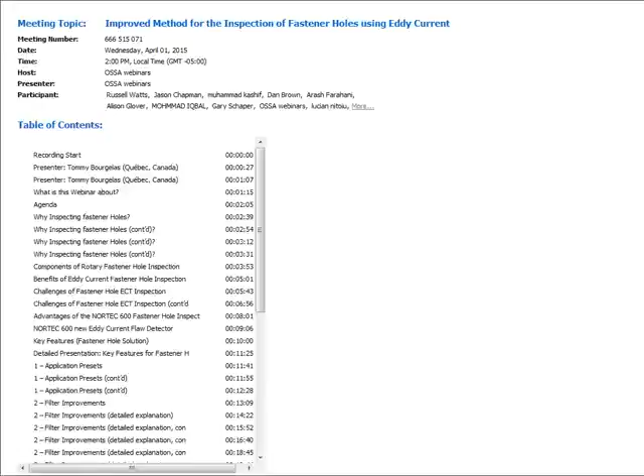I'd like to welcome you all today to this webinar titled Improved Method for the Inspection of Fastener Holes Using the NORTEC 600. This Olympus webinar is an introduction and overview to the fastener hole inspection solution in aerospace applications using the NORTEC 600 eddy current flaw detector.

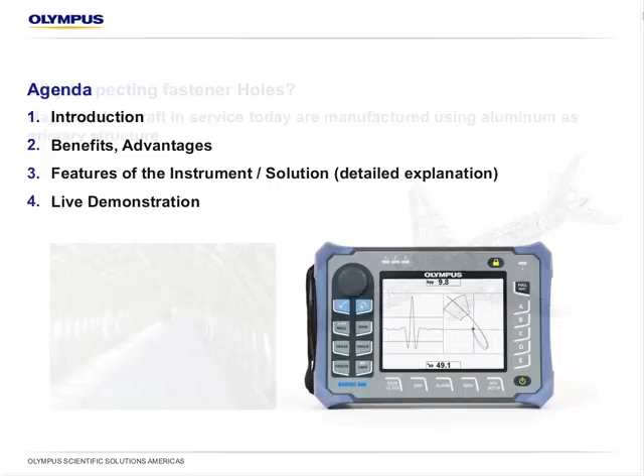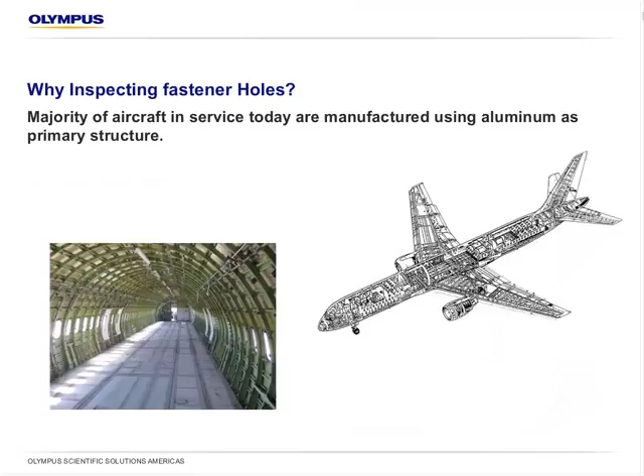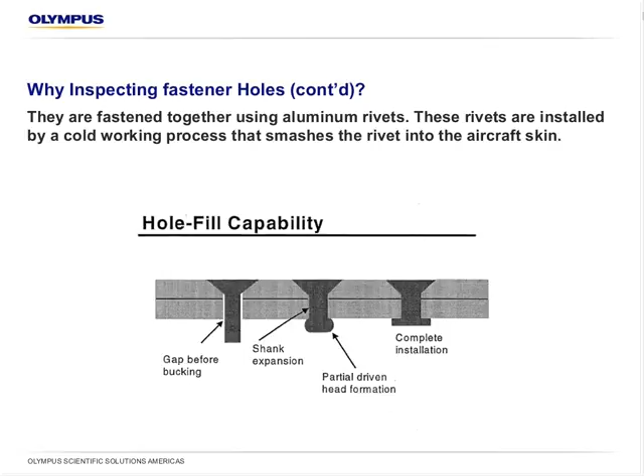So, why inspect fastener holes? Well, I don't think that's new to anybody listening, but the majority of aircraft in service today are manufactured using aluminum as primary structure. All those skins are fastened together using aluminum rivets, not only the skins, but the structures and the units, a lot of things. Rivets are installed by cold working processes, smashing the rivets or bolting parts together, eventually to the aircraft skin.

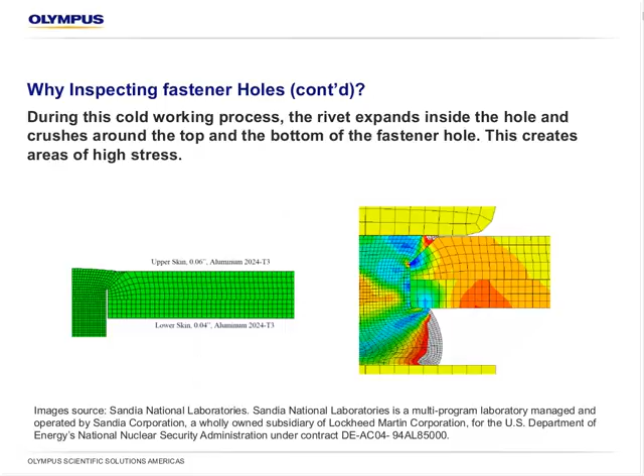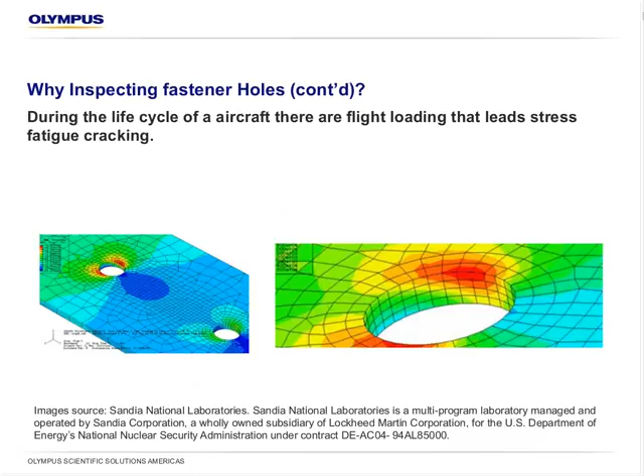So, obviously, the insertion of rivets in particular does stress the rivets themselves and the skin around them, creating areas of high stress, which can be seen in red on those simulated pictures. It's the same during the flight cycles. After a number of cycles with repeated load on specific areas around fasteners, those skins will eventually develop cracks, which can be detected by this eddy current method.

So, the eddy current test, we call that the rotary fastener hole inspection. Often you'll hear me say bolt hole inspection. During everyday work we refer to it as bolt hole, but it does not only inspect bolt holes, but rivet holes and all kinds of holes. So the first component is the probe itself. I hope you can see my laser pointer here, but that probe rotates inside the hole to be inspected. And this is powered by a rotary scanner.

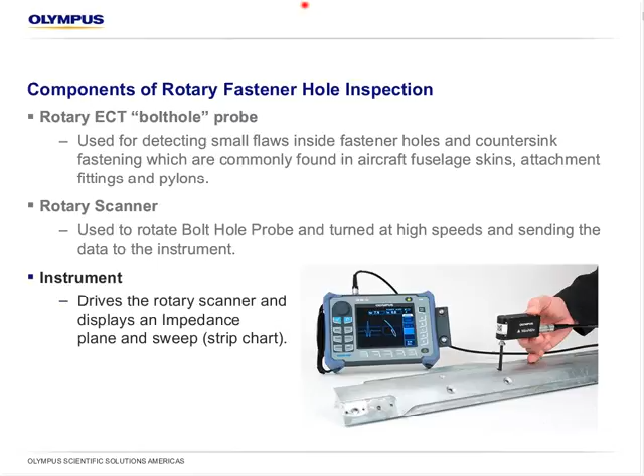Here's the example with the mini scanner. It's used to rotate the probe and also sends the data to the instrument. The instrument drives that rotary scanner, which is basically just an electrical motor and a couple of electronic components. And inside the instrument, we can see an impedance plane and often a strip chart display.

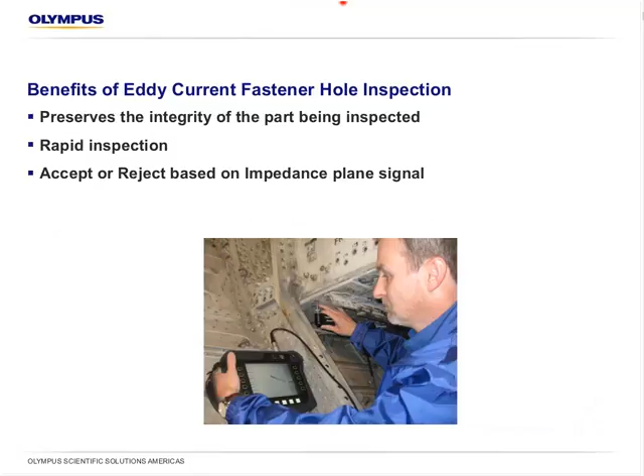So, benefits of eddy current fastener hole inspection. Eddy current allows you to preserve the integrity of the part being inspected for the simple reason that there are no chemicals involved; nothing can alter the chemical composition, has to dry, or will cause corrosion. No paint has to be removed. A lot of reasons make eddy current ideal to preserve the integrity of the part. It's also a very rapid inspection and can be configured as a go-no-go, a fairly simple accept or reject based on the impedance plane signal. However, there are challenges in doing that inspection. I'm going to more or less read the text here.

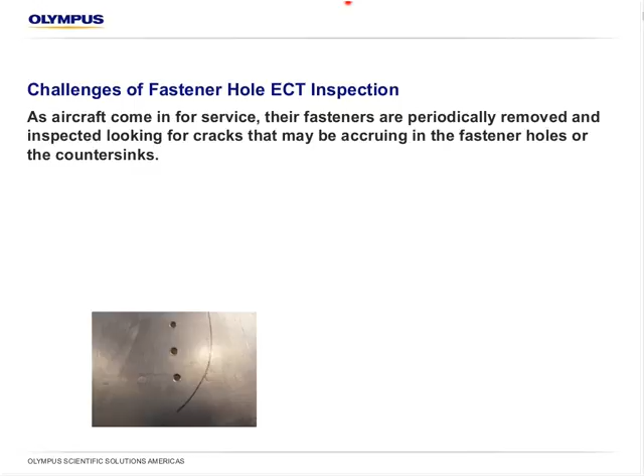Basically, as the aircraft come for service, their fasteners are removed and inspected, looking for cracks that might be occurring from the fastener holes or in the countersinks. So during the removal of those fasteners, there's a lot of various damages that can occur into the hole itself. While that damage might not be detrimental to the life of the aircraft, it can certainly generate quite a bit of noise or unwanted signal on the eddy current.

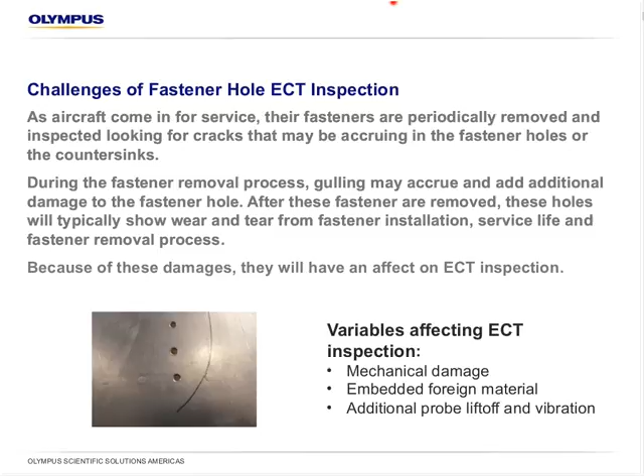So we call them variables affecting eddy current inspection. Well, mechanical damage, let's say some threading, some scratches being done as the fasteners are getting removed. Embedded foreign material, whether it's from the installation or occurs during the removal of the fasteners, and additional probe liftoff, which is caused by vibration, can also be observed. So the mechanical damage and all the embedded foreign material, additional liftoff, will have an effect on the impedance plane. However, they can be interpreted from the impedance plane of the instrument.

The filters, typically there's a high-pass and low-pass filter on the instrument. They are key to facilitate the signal interpretation. And generally speaking, those filters are not that well understood, and also different operators or operators using different equipment can have different results on the same part or on the same calibration specimen. So tuning the filters is always a bit tricky. Moreover, when changing the rotation speed of the scanner, one would need to readjust the filters to make sure that the band of frequencies allowed remains acceptable or allows the test to be made.

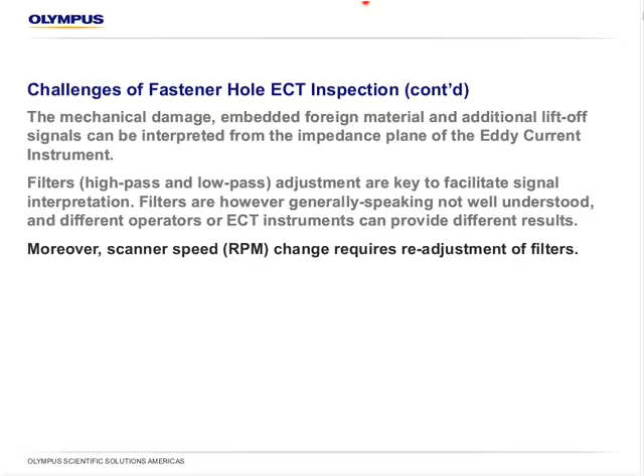So, the advantages of the NORTEC 600 fastener hole inspection solution. First of all, and I will talk quite a bit about it, it has application-specific menu. Basically, it's presets that speed up the parameter selection. There are some filter adjustments possible. However, for the most common everyday use, the filter adjustments are not needed. They can be adjusted, but it's just not needed for most of the cases. The results are consistent regardless of the operator performing the inspection.

There's a new link function that basically adjusts the filters according to the scan RPM or rotation speed of the scanner. Finally, we will learn about figure 6 and figure 8. Basically, the NORTEC 600 features those two signal shapes, and that contributes to satisfy all aircraft manufacturer requirements.

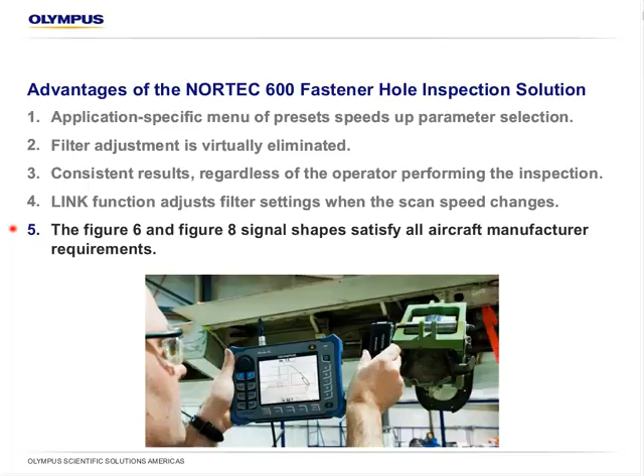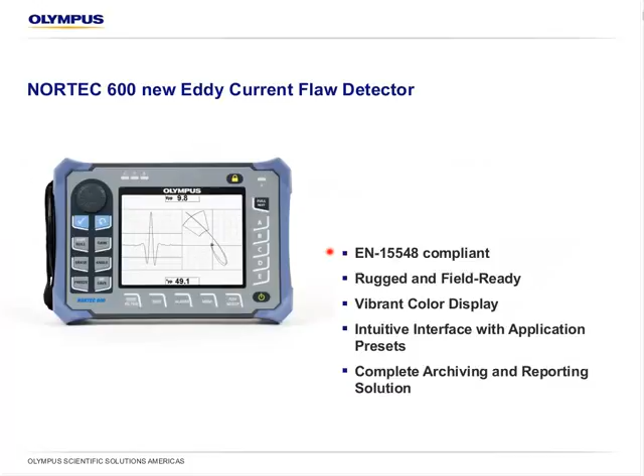So this is a snapshot from the NORTEC 600 brochure. It's rugged and field ready, has a fantastic display, one of the best, if not the best in the industry. Has intuitive interface with the application presets. The buttons or menu operation on this machine are extremely intuitive and easy to use. It also has a complete archiving and reporting solution thanks to the PC software that's shipped with the unit. And to please European customers or those that need to follow the ISO standard, this NORTEC 600 is actually compatible with the EN or ISO 15548 standard.

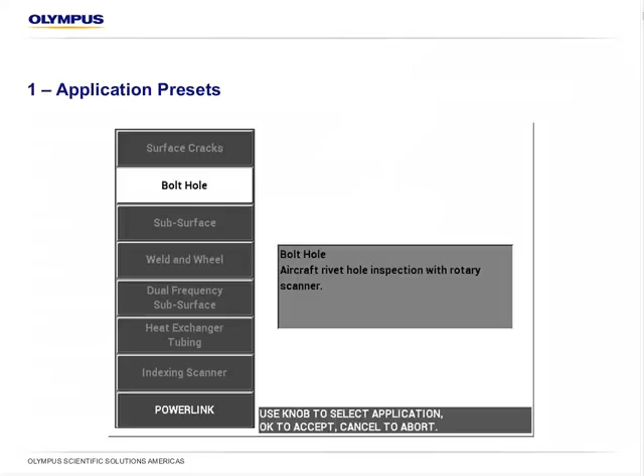So let's go in the meat of this presentation, really to display the key features, the real improvements that made this solution an improvement for fastener hole inspection. So number one, application presets. When you power up the NORTEC the first time or at your demand, you can access this menu. It's called application presets. Those are basically factory presets that will call all kinds of settings for all the common eddy current applications, including the fastener hole inspection. It saves the user from a lot of steps because, well, everything's preset pretty much. And it also allows you to instantly configure for fastener hole inspection.

As you will see during the live demonstration, it takes only 4 or 5 steps before I get to the end results. And within a minute or so, I can get a calibration done, starting from scratch. So what's preset actually is all the display modes, the synchronization, the speed, the high pass and low pass filters, the eddy current settings, frequency, probe drive, all that.

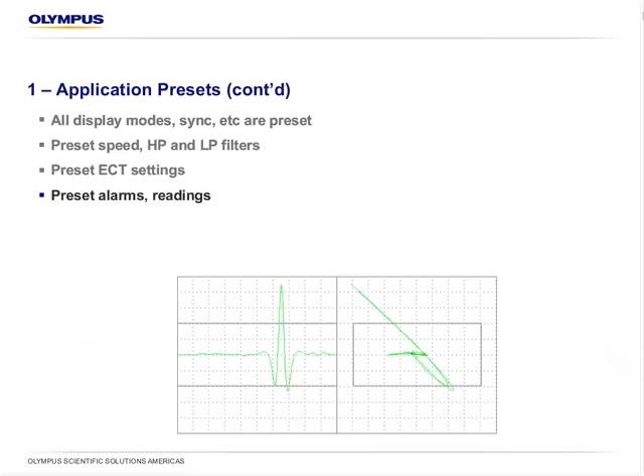The alarms, if you need them, they're preset. If you don't like them, you just turn them off. It's faster than adjusting the box if you need it. The readings, all that is preset. And pretty much the only thing you would need to adjust is the frequency, liftoff, gains, and then you would have instantaneous results just like that split screen.

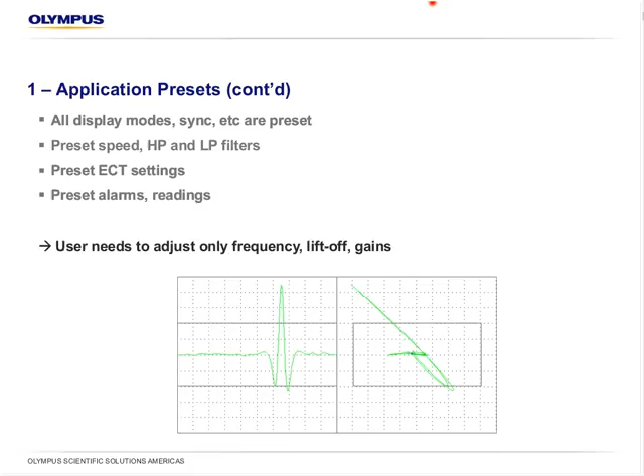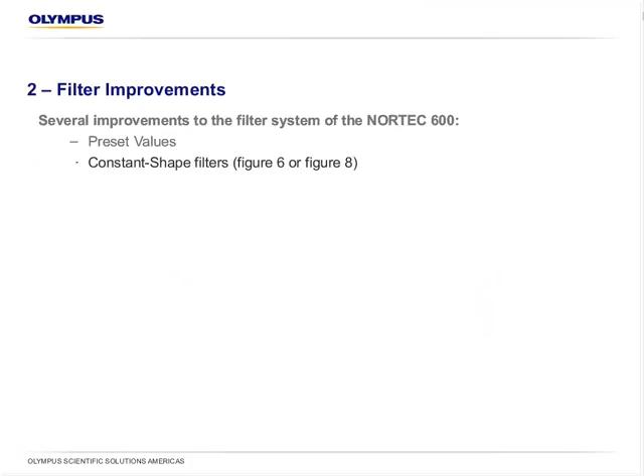So, filters. This section is the biggest of this presentation. There's been a lot of improvements to the filters. Basically, the filter system of the NORTEC 600 is entirely digital. It does have preset values. It has constant shape filters, figure 6, figure 8. We will see what it means. It also has a new link function. We will also see that later.

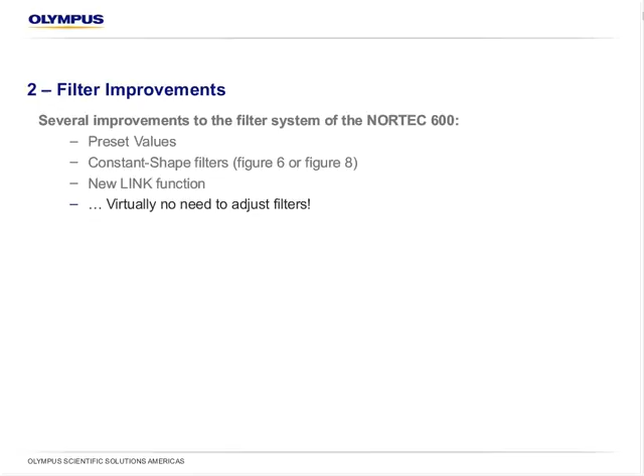And again, virtually no need to adjust the filters. Well, you can still adjust the filters, and you might still want to adjust the filters in extreme cases. Let's say if you're inspecting a 3 inch diameter, which is a 76 millimeter hole, maybe the filters might need some tuning, but for the bulk of the work and most of the time, you would not need to adjust those filters.

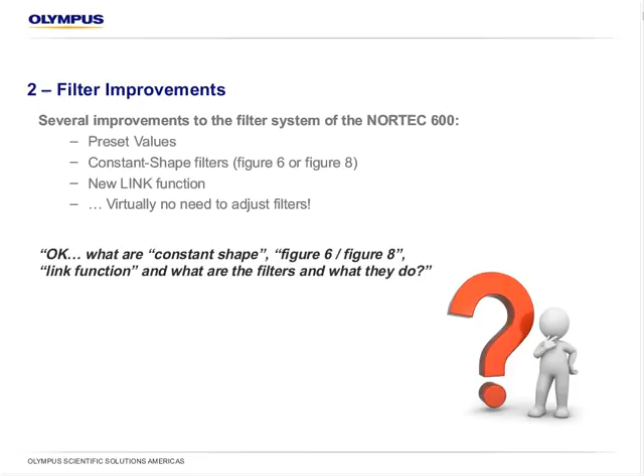So, you may ask, all right, what is constant shape? What is figure 6? What's figure 8? The link function, and what exactly do the filters do to help me? So, here's some further details. The explanation starts with the probe. So we have to know a bit of the probe construction in order to understand the rest.

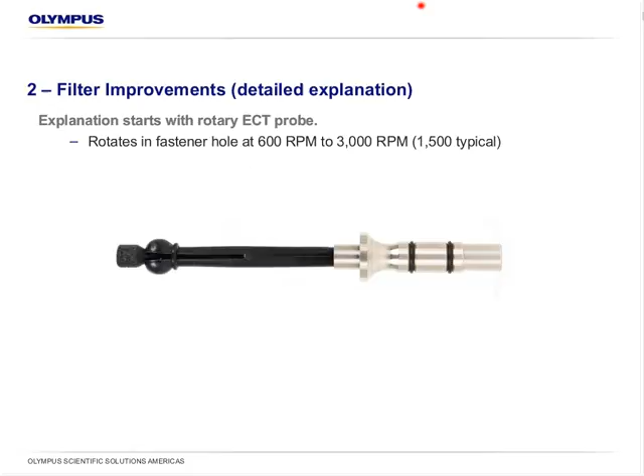Without going into too much detail, that probe is basically rotating in the fastener hole, whether it's a plastic probe, expandable, stainless, or stainless expandable. They all do the same job pretty much. They rotate from 600 RPM to 3,000, 1,500 RPM being a very common speed where POD or probability of detection studies are made. The coil itself is a differential, we call that a split D probe.

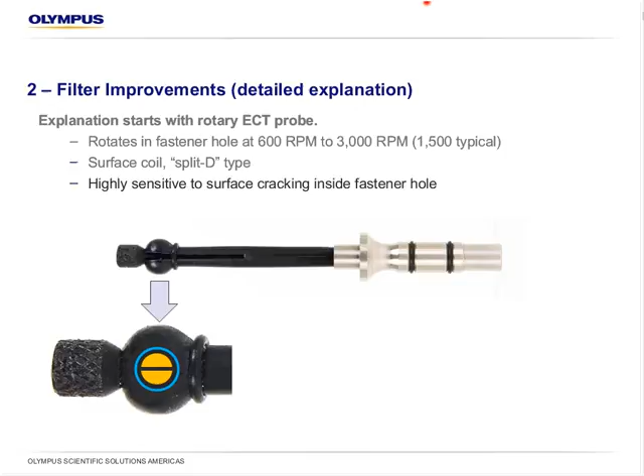It's basically reflection. There's a driver around two pickup coils that are next to each other, and they make a differential probe. That probe is highly sensitive to surface cracking inside the fastener hole, and it's a differential coil in nature. So a differential coil will provide a differential signal, and that's basically the root of the figure 8. We call that figure 8 because it creates an 8 figure from the eddy current signals.

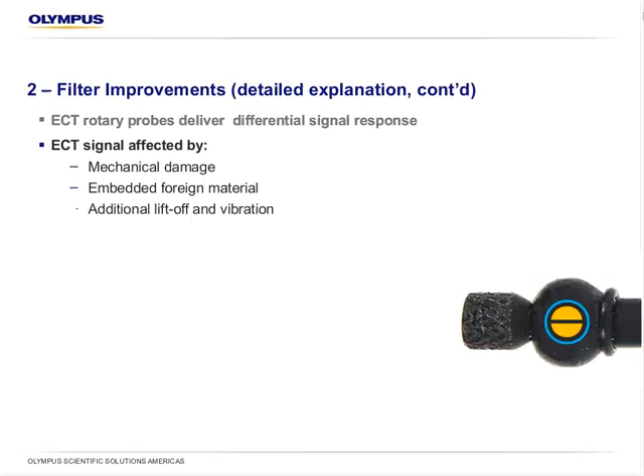And the reason why it's an 8 is simply when the crack hits the coils, it hits one coil before the other, and because of that, it creates one loop before the other. So the eddy current rotary probes deliver differential signals. The eddy current signal is affected by mechanical damage, embedded foreign material, additional liftoff and vibration. And the instrument filters aim to improve signal quality.

Basically, one of the main purposes of filters is reducing the strong rotation noise, basically the noise that comes from the test itself. Also, one use of the filter is to smooth the signal shape for an easier analysis. And finally, we basically try to achieve a clearer signal for easier interpretation.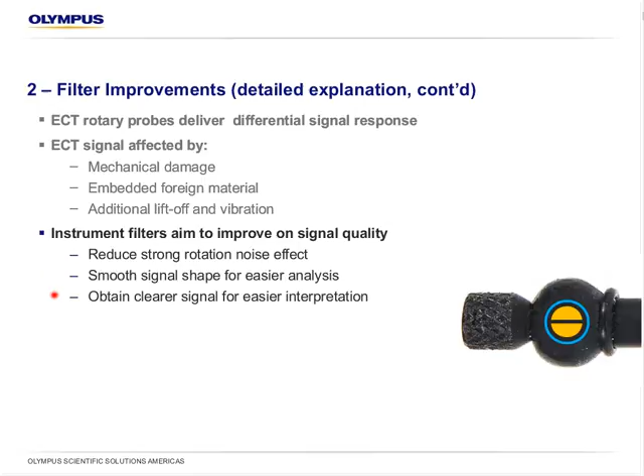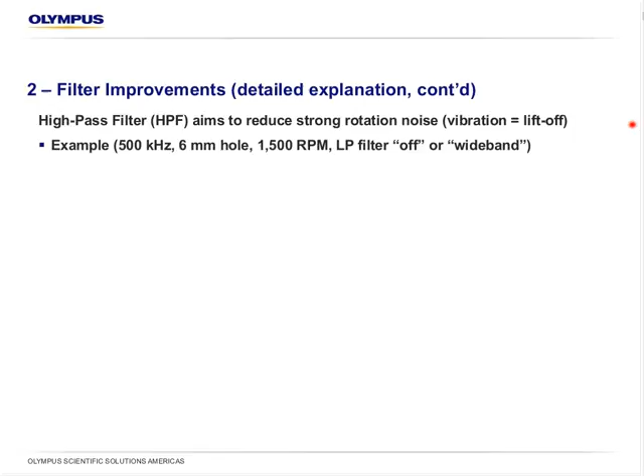So, the high pass. There's a high pass and there's a low pass in the settings. The high pass is the most important. That's the filter that does most of the cleaning up of the signals. The high pass filter aims to reduce strong rotation noise or vibration or liftoff. In this example, imagine a standard aluminum standard scan at 500 kilohertz. It's a 6 millimeter hole. The speed of the scanner is 1500 RPM. The low pass is off or wideband, because a low pass can never be totally off.

So we can see that background signal here becomes smaller as we increase the high pass filter, up to a point where it gets ideal: there's almost no vibration left and there's quite enough of the crack signal. And if we keep increasing the high pass, we basically don't gain anything because it starts to decrease the amplitude of the crack signal, and we don't gain much in signal to noise ratio after a while. So for that reason, we will say that the high pass of 125 hertz in that specific condition is actually ideal. All right, let's go to the low pass now.

The purpose of the low pass is to clean up the signal, make it smoother so the signal looks better and is easier to do analysis. So basically, the same example now with the high pass tuned at 125, that's the same screenshot as before. Now if I activate the low pass, 1500 hertz, pretty much no effect. 800, there starts to be a small effect. 600 down to 400. At 400, the signal becomes very sharp, very straight also, so very easy to interpret.

So as I lower the low pass again, the signal remains the same but just gets smaller. So again, after a while, we don't gain much by lowering that low pass. So the sweet spot, oops, I'm sorry, I touched it anyway. The sweet spot would be the 400 hertz low pass here because we get the best signal without starting to lose amplitude. Okay.

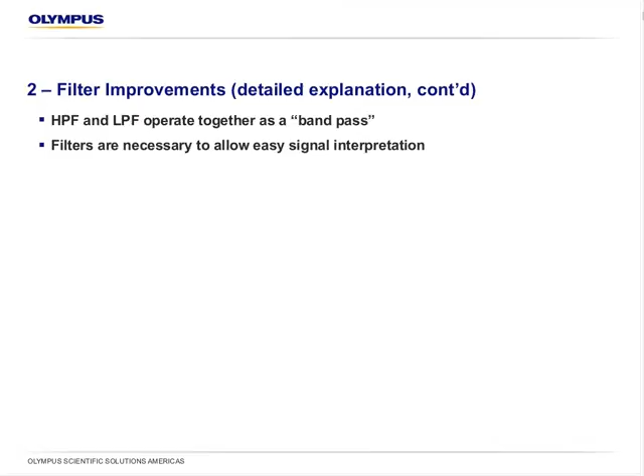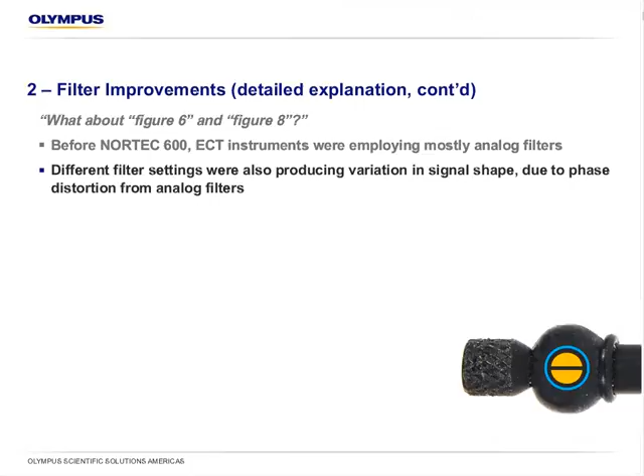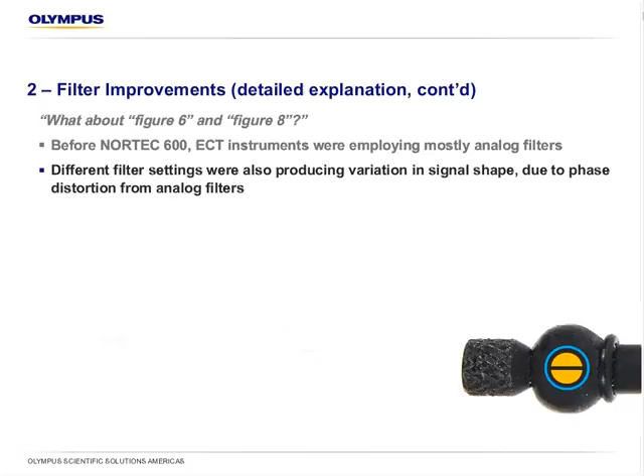So what about figure 6 and figure 8? Well, before the NORTEC 600 with its digital filters, the eddy current instruments were employing mostly analog filters, and analog filters are made of resistors and capacitors for the most part. Basically, different filter settings would also produce variation in signal shape due to the phase distortion from analog filters. So the same instrument would deliver a figure 6 up to a figure 8 depending on the high pass settings. So yeah, the distortion comes mainly from the high pass, and that might raise some questions.

So I'm talking about distortion. Well, the figure 8 is a relatively non-distorted signal. That's the source or native signal from the probe. With the high-pass filter, when tuned properly, we can actually obtain a figure 6 looking signal. Well, it's an inverted 6 on aluminum. It would be a non-inverted 6 on steel. But anyway, it looks like a 6. And that signal actually has quite a lot of advantages that we will see later on, but it was achieved in analog equipment by proper tuning of the high-pass filter, and that's caused by some phase distortion from the analog filters that is exploited.

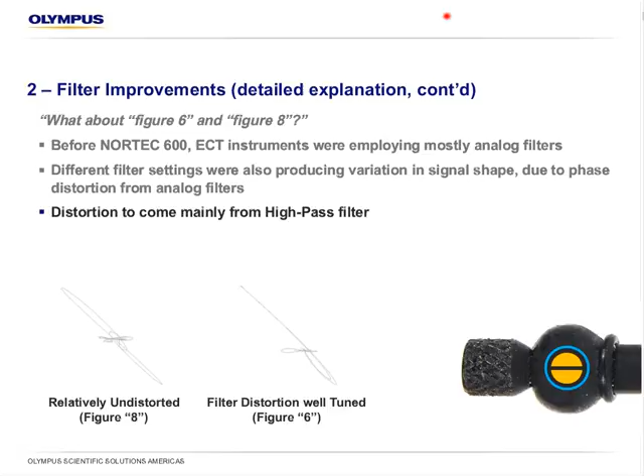So depending if that figure is up or down or inverted, we can tell which one is first, but it needs quite a lot of practice to say that. But with the figure 6, actually, the signal points to where the angle is, so there's no questioning. It's a very clear phase indication. Without any hesitation, I can tell this is a 45-degree or so signal.

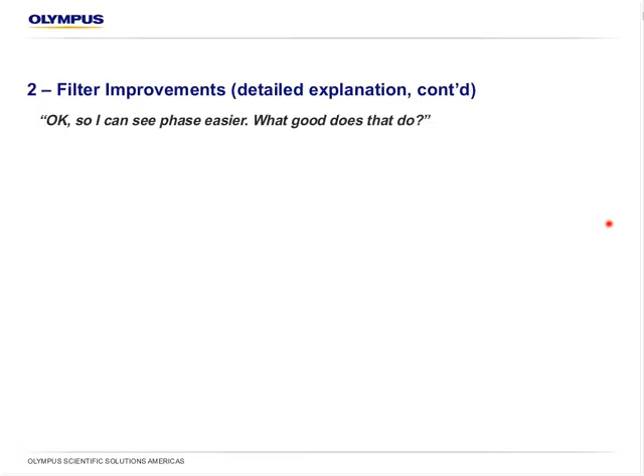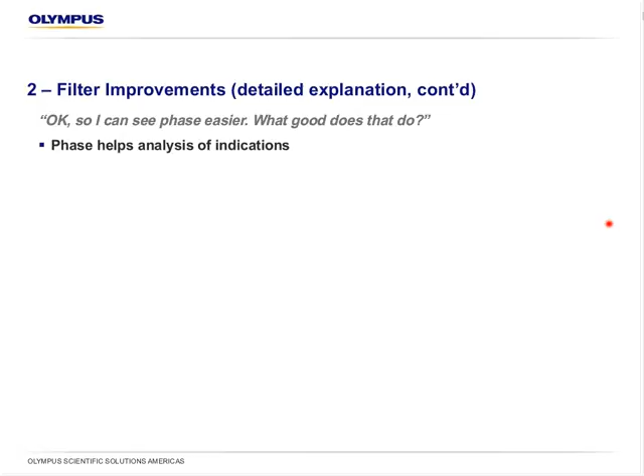So, all right, you may say, I can see the phase easier, but what's the advantage if I'm going to inspect those holes? The phase actually indicates a lot about the indications, whether they are genuine or false indications. So genuine indications will point to specific angles, and that's all because of eddy current 101, eddy current theory, that predicts that surface cracks will have a certain angle, liftoff will have another angle, subsurface might have another angle, inclusions will also react differently. So all kinds of variables will react differently to the eddy current test.

And that's not new or specific to that application. It's just the physics of eddy current testing. So non-relevant indications such as surface scratches and shavings will also point to other angles than the genuine defects. It's not impossible to do that with the figure 8, I mean separate the indications, genuine from false. It's just a lot easier with figure 6.

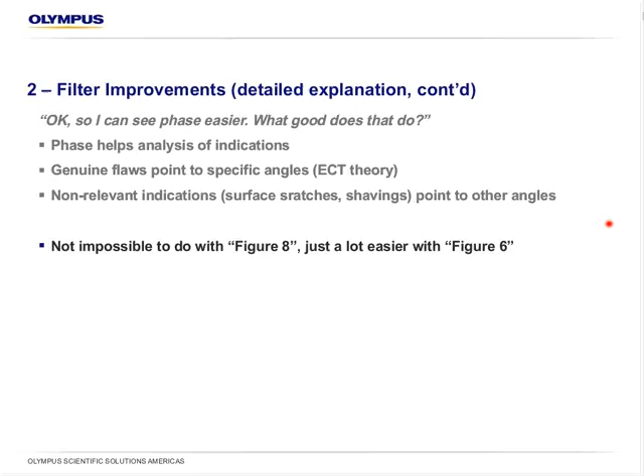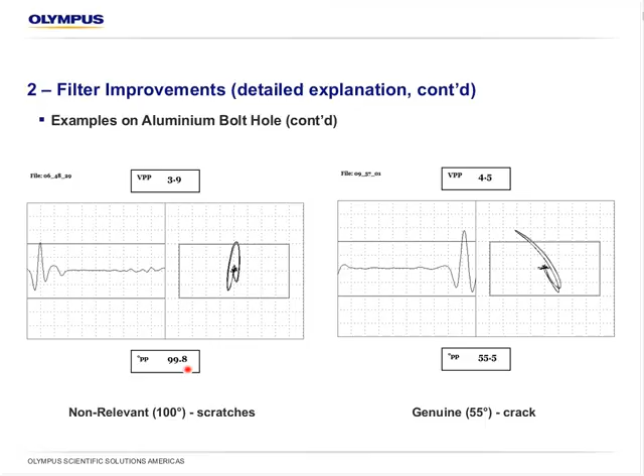So another example with thread marks. I hope you can see that blue image from your location. It's basically a horizontal signal, just like liftoff would give, and the real crack is actually 120 degrees. That one was a fairly large crack. So that's again quite a lot of difference.

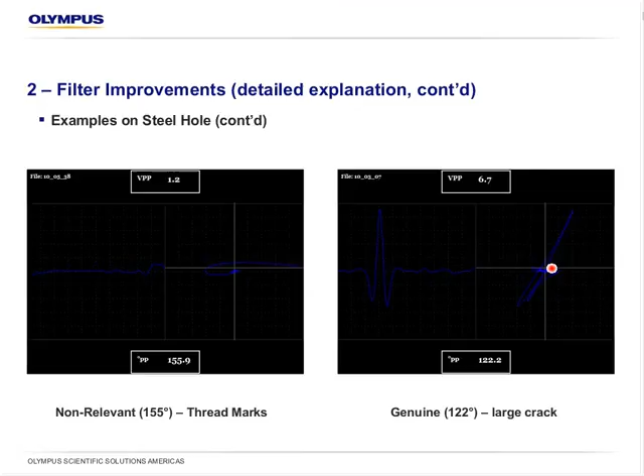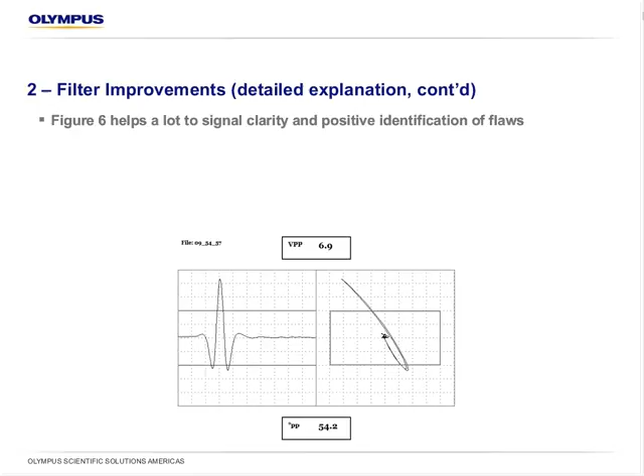So the figure 6 helps a lot to identify the signal clarity because there's only one excursion of the signal to consider and not two. So it helps to identify those flaws. And the NORTEC 600 features the new real-time readings that display the live signal angle. Basically, that number appears live, and we will see it during the demonstration.

There's also the constant shape or constant signal shape filters, and there's a patent in progress on that. Basically, that allows you to keep the figure 6 or 8 regardless of the value of the filter. So if you like figure 6 for an application, you will never lose it depending on the filters if you wish to tune the filters, because it's constant shape. It's always tuned to a figure 6, which was pretty much impossible to do with the analog equipment back then. It seems long ago, but really wasn't. And it's not entirely impossible, it just would have needed such a big circuit to perform that.

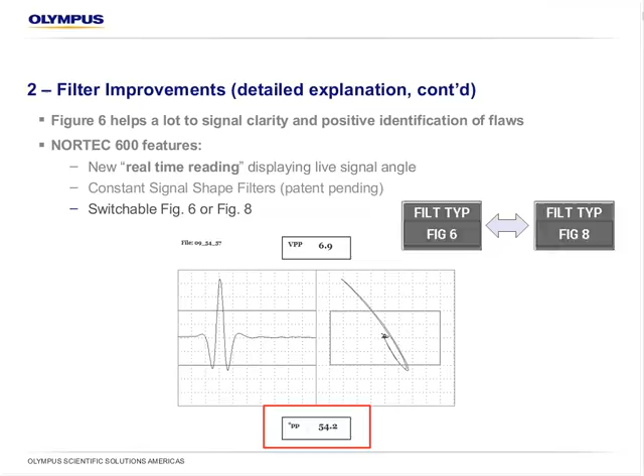So the NORTEC 600 is also switchable between figure 6 and figure 8. There's an instant control, and I'll try to demonstrate that later on. So you might ask, how about if I change the rotation? What happens to my filters? A very good question that we get frequently. The new link function answers that. It will adjust the high pass and the low pass according to the rotation speed. So you can still change your filters as needed. However, the link will track the rotation speed and adjust those filters.

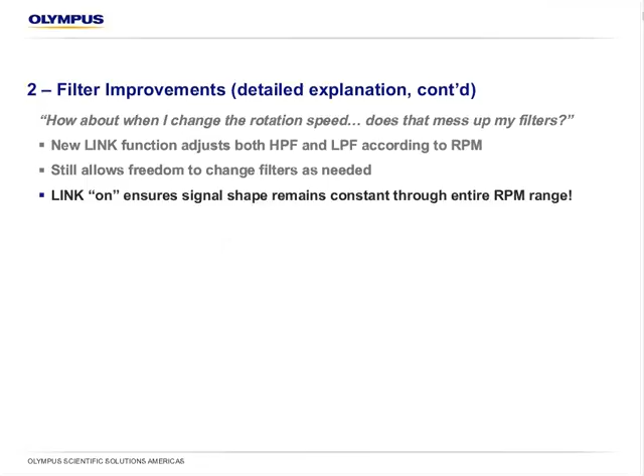The advantage is when the link is on, it will ensure that the signal remains constant through the entire RPM range. So here's 3 examples. Let's say we calibrate at 600 RPM, very low speed, high pass 50 Hertz, low pass 160. Now we increase to 1500 RPM. The link will automatically adjust those filters, and I hope you can see the signal, but there's basically no difference between the two because the filters are properly set in both cases by the link function. Even if we stretch to 3000 RPM, the high pass and the low pass get adjusted and the signal remains the same. The only difference I can tell is that the 3000 RPM might be noisier because there's more vibration at higher speeds, but that's pretty much it.

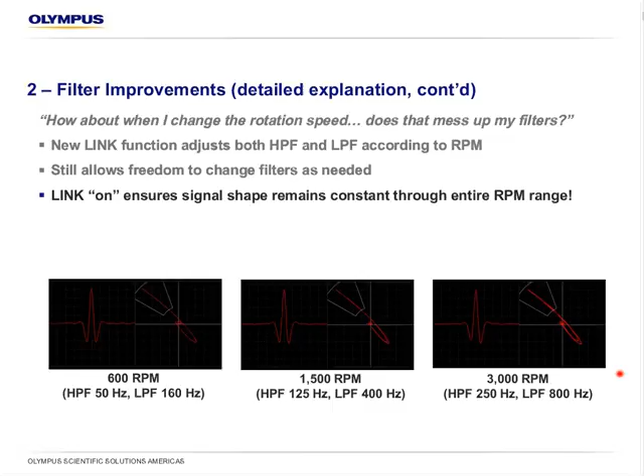So another improvement that the NORTEC 600 brings is obviously it does support the Olympus scanners, and we currently offer 3. There's a MiniMite general purpose scanner. There's the RA2000, which is useful for tight access. It has a smaller footprint. And the Spitfire is a gun-looking scanner. It has more torque for larger diameter holes.

We didn't stop there. We also made the NORTEC 600 compatible with the most popular competition scanners out there, perhaps the GE or Hocking mini drives. There's two recent versions that are supported, Rohmann MR3, and we're working on some more.

One of the last improvements that are applicable to bolt hole or fastener hole inspection is complete archiving and reporting that comes with the NORTEC 600. Basically, you can save files instantly. Up to 500 files can be saved on the micro SD card of the instrument. The programs or setups and data files are actually merged into single files.

So I don't know how many times I've heard comments like, hey, I thought I saved my file, but I can't find it, because somebody saved the data file and thought they saved the program, or the opposite. So that's not happening anymore because there's only one file directory, and each file saves both the data and the program inside.

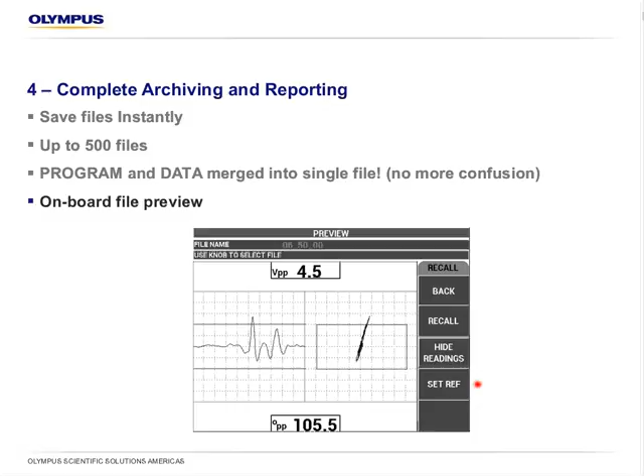So thanks to the NORTEC PC software, the complete archiving and reporting is very easy. 3 steps: basically save all the files you want. Then you connect to the USB port and import those files in NORTEC PC. The NORTEC PC software is fairly intuitive, and then you can press export all files as PDF, basically from a single click.

That's interesting. Even though you had 200 files, you still press a single click and you obtain 200 separate PDFs for each of the files that you recorded, and then you can easily archive that to suit your workflow.

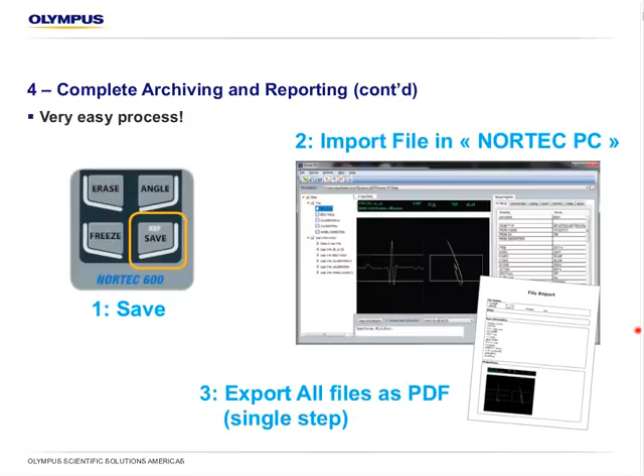So it seems we have reached the live demonstration of the instrument, so I'm going to switch to basically a VGA capture device that allows you to see the screen. Unfortunately, you can't see what I'm doing. I'll try to describe as I go, and you also cannot see the buttons that I'm pushing, but when necessary, I'll try to make that clear.

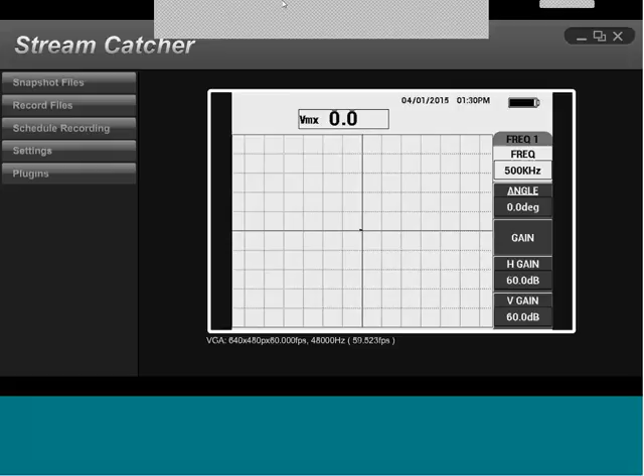So basically, the instrument right now, as it is, is configured for surface. So it's not a fastener hole inspection application. It's just a plain impedance plane using the outdoors color scheme. So right now, I'm connecting the MiniMite. I actually did connect the MiniMite, so it's recognizing it thanks to the PowerLink technology.

So I press Continue, and then I get into an optional menu that I will actually use, because I highly recommend you use it if you play with the NORTEC 600, and that's the application presets. Basically, the interface suggests I use it, so I will press OK. And then I get into a preset screen with preset alarms, preset parameters. So 500 kilohertz, angle, gains, everything was preset, so it works from the start.

So let's see that. Now I have an aluminum standard, okay, so I'm going to null the probe. Now I just start the scanner. You might actually hear it rotating. And let's do the steps. Well, if application selection was step number 1, let's do step number 2, which is adjusting the liftoff.

So right now I'm setting my probe to barely touch or graze the surface, and then I press the angle key and adjust the angle with the knob. So I'm trying to put my liftoff as horizontal as possible, and because the system defaults to figure 8, that means 180 degrees reading. So next step, the track.

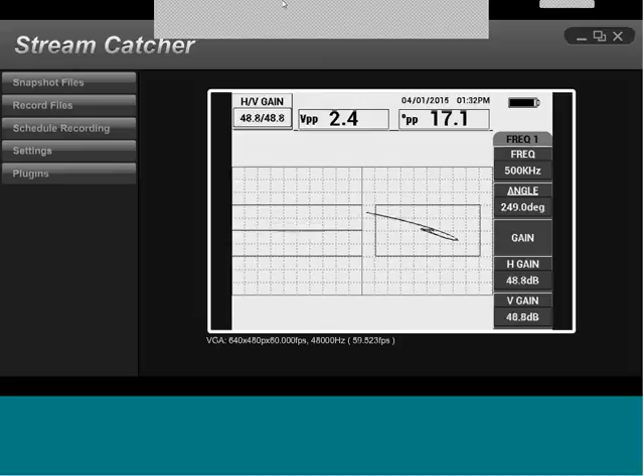Now I'm going into the track signal, okay? So I need to adjust the sensitivity or gains. So I press gains. I'll just make sure that I don't exceed the 10% mark here, horizontal, and then I'll increase my vertical gain until I have proper detection. And I'm pretty much done. I would be ready to inspect right away. And then the rest I'm going to show you is just options or other features.

So while I'm keeping this probe rotating, I want to show you that I can change my sync angle, okay, and I can delay this sweep signal. And then we can change the filters and all that nice stuff. So if I go to filters, we can see the filters.

And I talked to you about the scan RPM and the link function. So right now the link defaults to on. So let's see what happens when I actually lower the speed.

As you could see, I hope the filters were actually tuned and changed from the rotation speed, but the signal always stayed the same. Even though I increased to 3000 RPM, basically, as long as I maintain the probe at the same spot, the signal remains the same all the time. And even though I try to slow down the probe with my fingers, so I'm increasing the friction, you can see the speed change from the strip chart. Basically, the NORTEC will compensate for the speed and try to keep the speed always constant.

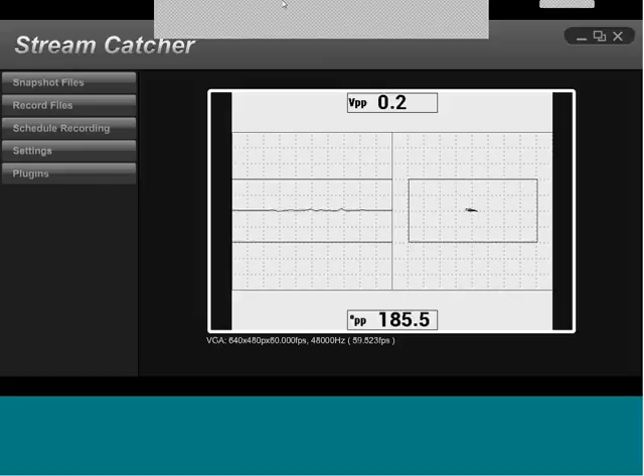So once you're happy about that, you can press the full screen key and get to the instant full screen display. The real-time readings, as can be seen at the bottom, basically show the angle. So if I go on a good hole, there's nothing really to report. As soon as there's an indication, we can see the angle. So right now it says 49 or so degrees. Here's another track, 46. So that's called real-time readings, and it's a live measurement of the phase angle.

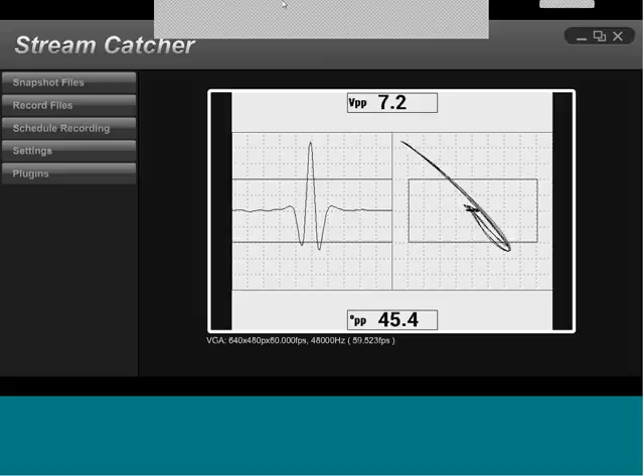So the top reading, there's more options, but it says VPP, that's not voltage, but vertical peak to peak. It's basically how high the signal spreads over the vertical axis, and the unit is divisions. So right now we can see almost 5 divisions on top and almost 3 on the bottom, so it's a total of almost 8 divisions. So in a nutshell, those are really the eddy current features that are immediately applicable to rotary fastener inspection.

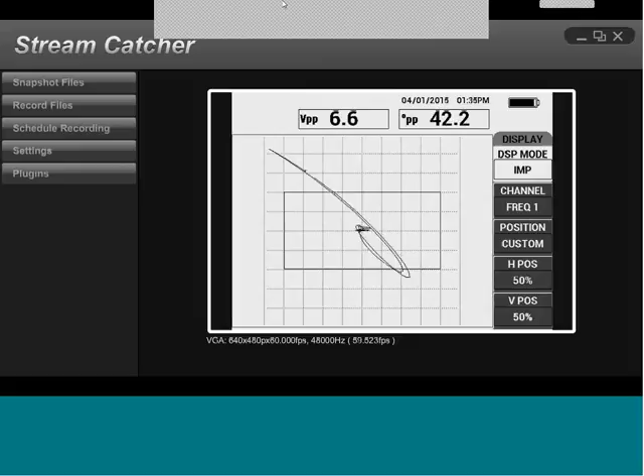I can also change the displays, go to a pure impedance plane, and basically I could freeze my display. Nothing prevents me from adjusting the angle a little bit better, because we have this new feature on the NORTEC that's called calibration from frozen signal. So right now I can tune my angle to be a little bit better adjusted. So as I unfreeze the equipment, I will just get a better signal.

Okay, so sweep and impedance was the default. We also have sweep only, and then I can change my grid. There's off, 10 by 10, fine grid, coarse. And there's also a waterfall display. So waterfall, I can make that a bit longer and set some auto erase on the waterfall. So basically, as I scan the entire hole, I can have some waterfall data, and it's also possible to do it in full screen mode. Anyway.

Well, the last demonstration I would like to do is using a steel reference standard, just to show you how easy it is and what sort of results you can have from the steel. Actually, it makes me think that I did not show you the figure 8, so I'm sorry about that. Let's go back to the special menu. So right now the default is figure 6. I can go here, change it to figure 8, and for engine inspection, for instance, we would have instant constant figure 8 throughout the filters range. Okay.

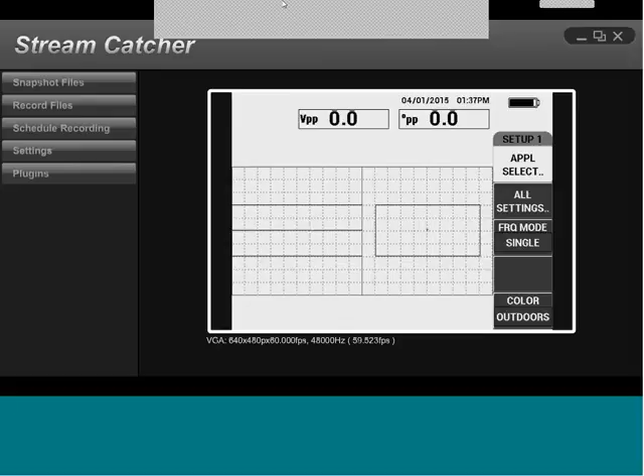All right, back to what I wanted to show you. I need to go to the application section. I will again recall the bolt hole inspection just to default the system. I just press null, and I'm pretty much ready to calibrate on that steel. So the difference with the steel is we'll have to employ less gain. So let's lower the gain already. And then I'll adjust the angle the same way. So the lift off goes to the left, or 180 degrees.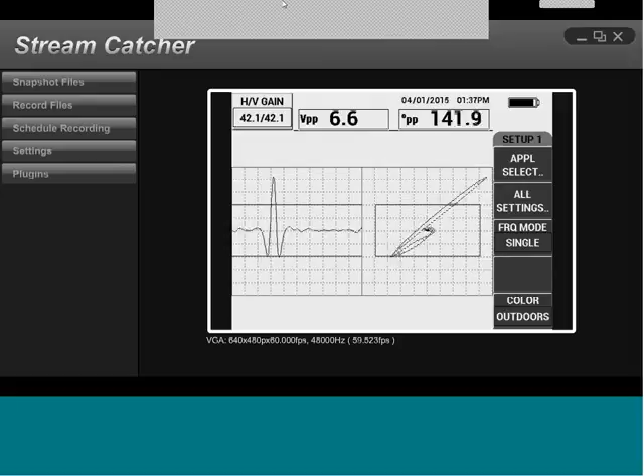And then I should be able to basically adjust that signal. So that's the crack indication. Okay. So horizontal gain may be a bit less. I guess that would do it. And then full screen. And now I have a perfect figure 6 for bolt hole inspection.

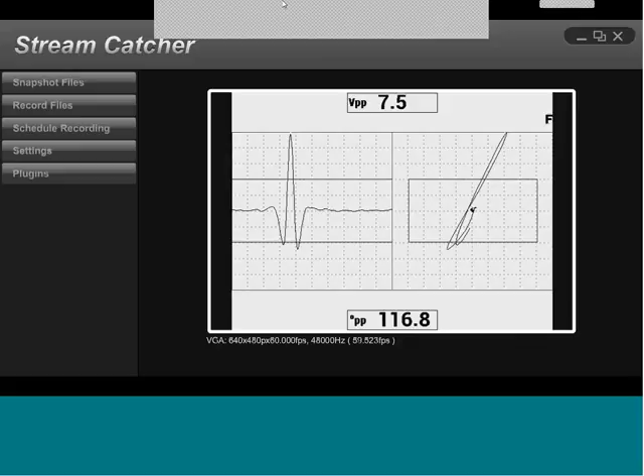So that quite concludes the live demonstration of the NORTEC 600 instrument configured for fastener hole inspection.